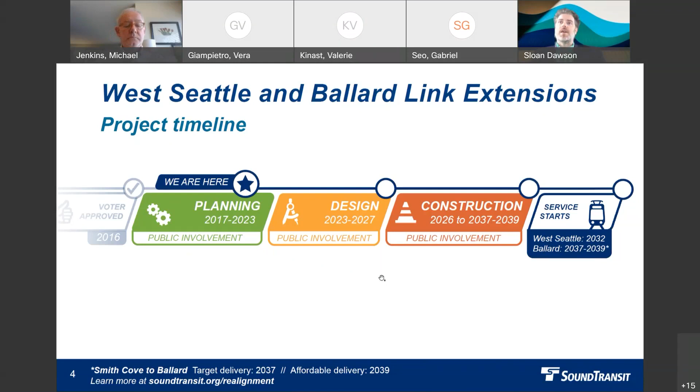So looking a little bit more at the planning phase, we've been in alternatives development from 2017 to 2019, which really defined the routes and station locations that we're going to study in the EIS. Now we've been working towards the draft EIS and just published that at the end of January. We're in the public comment period for the draft EIS, and that will close on April 28th.

At which point the board will confirm or modify the preferred alternative, which we do have for this segment coming out of alternatives development. The only segment where we don't have that, as we learned in our last presentation, is in the CID. So this upcoming milestone will be either a confirmation or modification of preferred alternatives, or identification of preferred alternatives in the case of the CID potentially.

This will move us into the final EIS. And once we're through the final EIS, there will be a record of decision that identifies the project to be built and moves us into final design and construction.

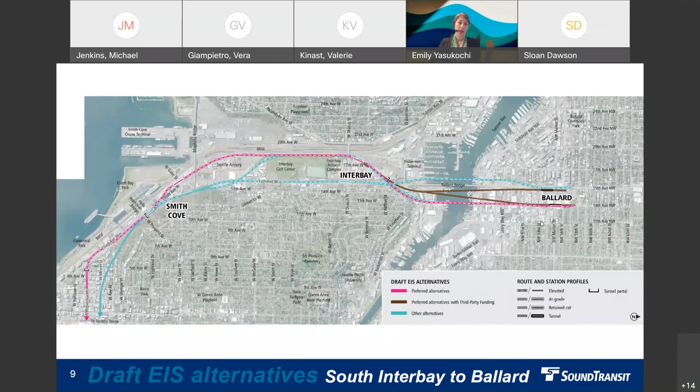Also want to point out where it says Interbay in bold, that's another segment boundary, and you can see there are two areas where those connect: either behind, between the golf course and the railroads, that's one connection point, and then 15th Avenue is a different connection point. So as I go through these, you'll notice that alternatives connect at one point or the other, and those are limitations to potential connections in the draft EIS.

So I'm going to start with some general information, including some of the project benefits and other information about the project.

This slide shows transit travel times and reliability information. In the PM peak in 2042, the project is expected to get riders from 15th and Market in Ballard to Westlake downtown in about 11 minutes, as compared with 38 minutes by bus. For reliability, Link would have an A rating, while the bus would be an E or F in the evening peak period.

Next slide is ridership.

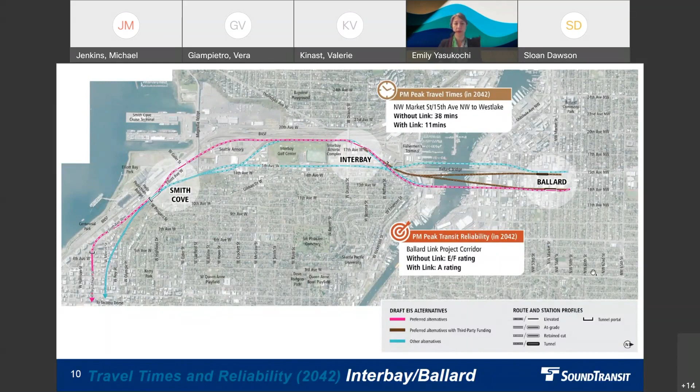For Smith Cove Station, ridership is anticipated to be about 2,600 average daily boardings, with most getting there by walking. For Interbay Station, ridership is forecasted at about 4,200 daily boardings, with two-thirds getting there by bus. And for Ballard Station, ridership is expected to be around 13,100 daily boardings, with just over half getting there by bus and another about 40% walking or rolling.

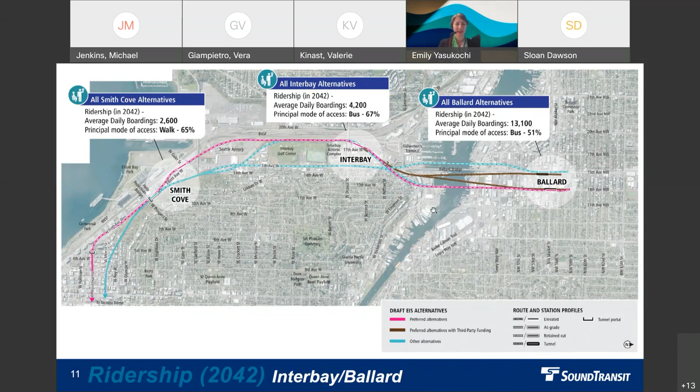The next slide is information on transit-oriented development potential for each alternative and station location. Because we're crunched for time, I'm not going to go over these in detail, but I'll note that in developing these estimates, Sound Transit generally used current zoning designations to model potential development capacity, but in some cases, modified zoning was assumed.

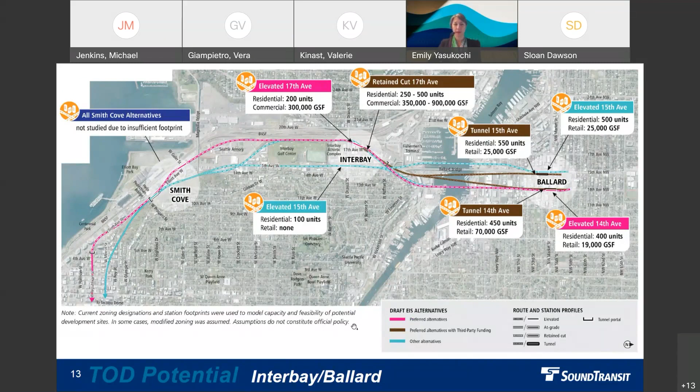So with that, I will go on to the draft EIS results, and I'm going to start in South Interbay. I'm going to go over the alternative first, and then I'll quickly go through some of the results, but you'll probably be able to absorb a little bit while I'm talking.

So the Galer Street Station Central Interbay alternative comes from that Republican Seattle Center station, continuing in a tunnel after it leaves that station. The tunnel portal is basically at the end of Republican, right before Elliott. From that tunnel portal, the alternative would become elevated, traveling up Elliott. Immediately after the portal, it goes to the west and then crosses back to the east side, travels up the east side, and then just north of Kinnear Park, it crosses back over to the west to serve an elevated Smith Cove station located above the Galer Street Bridge. It would then cross over the Magnolia Bridge and continue north along the western edge of the Interbay Golf Center, where it connects into the Interbay Ballard segment.

This one has a cost of approximately 1.3 billion. Let me go over the categories—they're similar within the segment. Each alternative in this segment will have project cost, residential displacement (units of residential displacements), historic property effects (number of properties), permanent park effects (permanent park area that would be displaced), biodiversity effects (essentially wildlife habitat area that would be displaced), and roadway effects, related to the approximate length of guideway that would be in or near arterial roadways—so Elliott and 15th in this segment. Some alternatives have more guideway in or near the roadway, which comes with things like columns in the roadway affecting permanent operations at some intersections, and also construction effects to build those.

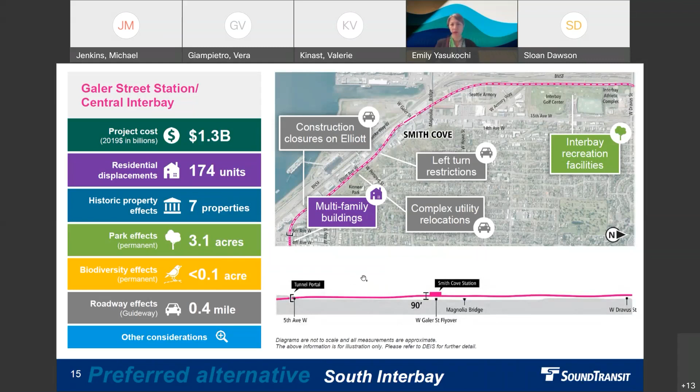Just to point out on this one: a project cost of 1.3 billion and 174 units of residential displacements, which is on the higher end for this segment.

Next slide. Now I'll talk about the Prospect Street Station 15th Avenue alternative. This one also would come from the Republican Seattle Center station, so it has that same portal at the end of Republican, the same guideway crossing a couple times over Elliott, but then it would come up the east side of Elliott to serve an elevated Smith Cove station just north of Prospect Street on the east side there.

And then it would continue along the edge of the Southwest Queen Anne Greenbelt before turning north and transitioning to the center of 15th Avenue, where it would continue up the median of 15th Avenue and connect in.

This one has a project cost of about 1.4 to 1.5 billion and is also higher on the higher side for residential displacements. It's on the lower side for park effects, but higher for biodiversity, because of that guideway in the Queen Anne Greenbelt area.

And this one has the most roadway effects at about a mile, because it has guideway both in Elliott and in 15th. And then the other considerations in the lighter blue color, that's just a place to put other things that are important to know about the alternatives that didn't fit into one of the categories above.

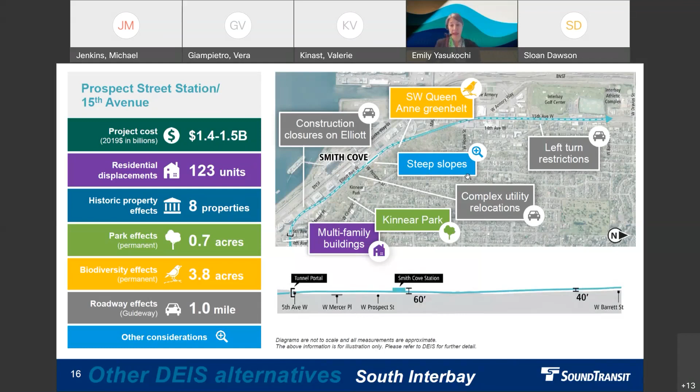This alternative has some guideway and station in the Queen Anne hillside, which is a steep slope ECA, or environmentally critical area. The need to stabilize the slope there would add some complexity to this alternative.

Next we have the Prospect Street Station Central Interbay alternative. This one comes from a different Seattle Center station, the one located under Mercer. It would continue underground from that station in a tunnel for a bit longer to the north.

Its portal would actually be around Prospect Street and Elliott on the east side. It would then serve a retained cut Smith Cove station just north of Prospect, curve along the bottom of the hillside there, turn west, go over 15th, travel up Armory on elevated guideway, and then turn north to continue along the western edge of the golf course.

This one has the highest cost of the three at about 1.5 to 1.6 billion. It also has the highest park and biodiversity effects, but the lowest residential and historic effects, and also the lowest roadway effects. It also has the station and guideway in that Queen Anne hillside steep slope area.

So it would have that similar issue with the complexity of needing to stabilize that slope.

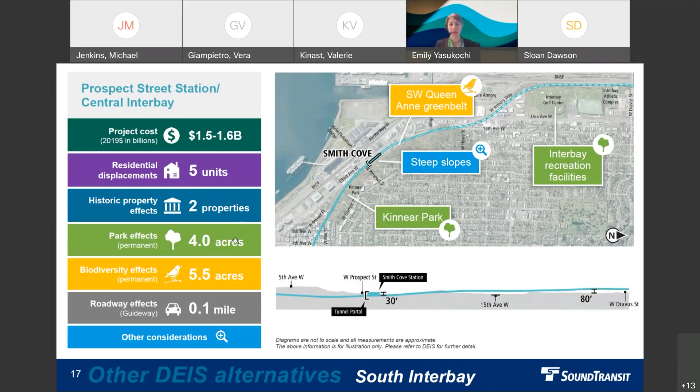Next is the summary slide, showing all those numbers together on one slide so you can see them all at the same time. We've added some shading to these: darker shades indicate higher performing elements, whereas lighter shades indicate lower performing elements.

I won't go over each of these, but we can maybe just pause here so you can take this in a little bit.

Okay, I know I'm kind of racing through these, but we have a lot to get through. So let's move on to Interbay Ballard, the segment to the north.

We'll start with the elevated 14th Avenue alternative. This one connects to those that come from the western edge of the golf course near the BNSF tracks. It would cross over the Dravus Bridge and serve an elevated Interbay station just north of Dravus, then continue on elevated guideway northeast over the Emerson Street interchange.

Then it would curve north to cross Salmon Bay on a high-level fixed span bridge. On the east side of the Ballard Bridge, it would continue north along 14th on the Ballard side and terminate at an elevated Ballard station on 14th Avenue Northwest, straddling Market Street, with entrances on both sides of Market.

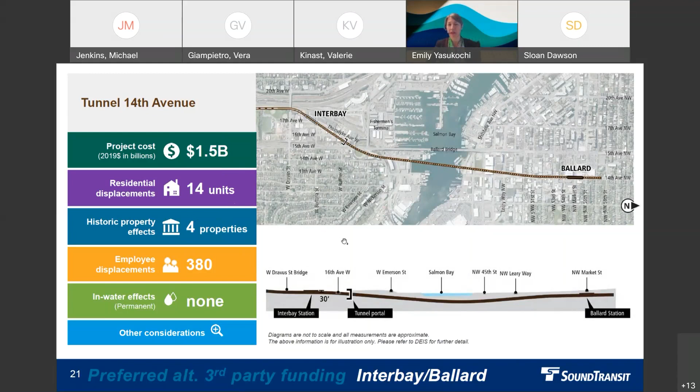With an estimated project cost of 1.5 billion and no in-water effects, all of these numbers, as you'll see when they're compared, are on the lower side of the various alternatives—lower in quantity, higher in performance.

Next we'll do the tunnel 15th Avenue alternative. This one is essentially the same: under Dravus, same retained cut Interbay station, same tunnel portal. Once it leaves the tunnel portal, it ends up in a different place—at a tunnel station on the east edge of 15th, completely south of Market Street, with entrance only on the south side of Market.

This one has an estimated project cost of 1.7 billion. When you see the comparison numbers, you'll see these are all on the lower side or higher performing side.

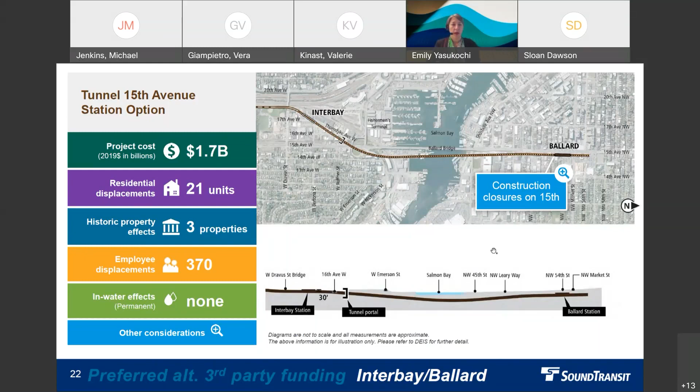Let's move on to the elevated 14th Avenue alignment option. This one connects the 15th alternative south of here to the 14th Bridge we've already talked about. It would have an elevated Interbay station above 15th and Dravus, then curve to the northeast and head north on that same high-level fixed bridge at 14th, same elevated 14th Avenue Ballard station. This one has a project cost of approximately 1.6 billion, and is higher—I think the highest—in residential displacements, a lot of those in some multifamily buildings in North Queen Anne.

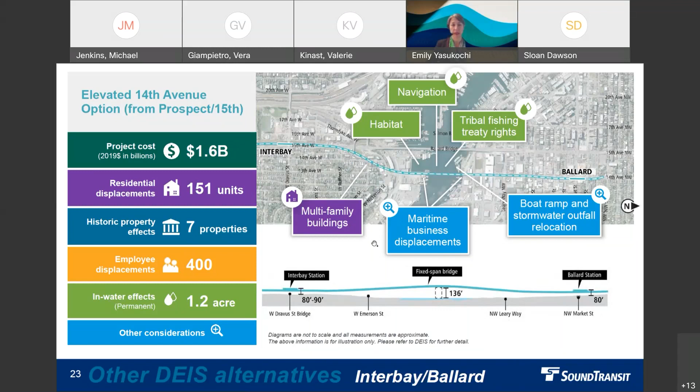We've already talked over some of the water and maritime business issues, so I won't spend time on that. We'll go to our last alternative here: the elevated 15th Avenue alternative.

This one also has that elevated Interbay station at 15th, over 15th and Dravus. But then it would curve to the west of the Ballard Bridge and cross Salmon Bay on a movable bridge span, continue north, then shift over to the east to join up with 15th, ending at an elevated Ballard station above 15th Avenue south of Market Street.

This one has an estimated project cost of 1.5 billion, with a lot of the same water-related effects. It has the eligible historic district at Fisherman's Terminal, so it would have effects there. Because it's a movable bridge span, we would expect some delays to the system when that bridge needs to open or raise for larger, taller vessels. This one is also the highest for employee displacements, with a big chunk related to the displacement of a commercial complex at 15th and Market.

Next we just have the summary slide. Again, same shading—darker indicating higher performance, lighter indicating lower performance. We'll pause here again and let you take it in.

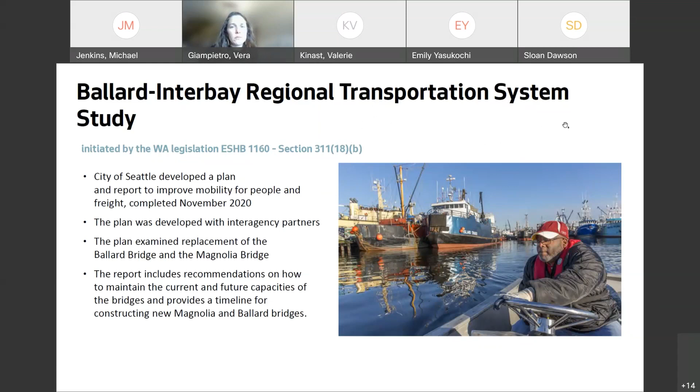So in 2019, just prior to the completion of that study, the city worked on what many of you are familiar with, the Mandatory Housing Affordability Program, which was adopted by council in 2019. I'm focusing on Ballard here because it's one of our hub urban villages in the city, and as you know, a location for a proposed Sound Transit light rail station.

When we worked on this project, what it involved is saying we're going to offer more development capacity, primarily within urban villages but also within our multifamily and commercial zones, and in exchange we will require contributions to affordable housing.

Part of what we did during that time is look at our comp plan, our most recent comp plan, which had a growth and equity analysis showing some parts of Seattle seem to be at higher risk of displacement and some at lower risk. Complementary to that, we saw some parts of the city have higher access to opportunity, and there are a bunch of metrics that help evaluate what contributes to displacement and opportunity.

As an overarching concept for MHA, we said, okay, if we're going to add development capacity but keep an eye out for displacement, in high opportunity areas that may have a low risk of displacement, we will expand an urban village boundary and make meaningful changes to the zoning development capacity there.

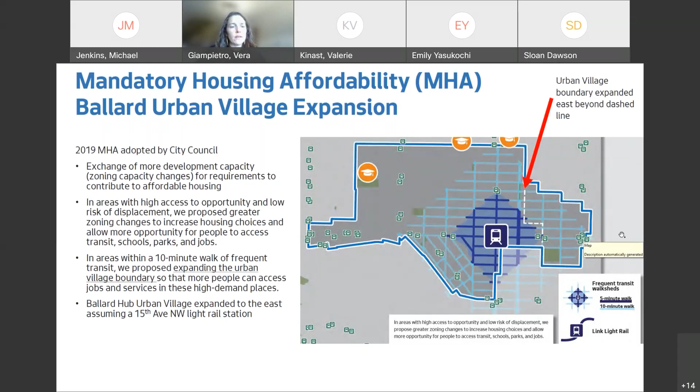We can move on to the next slide, and I'll have Geoff Wentlandt take it from there.

Thank you, Vera. I have a few slides here to tell you about the industrial and maritime strategy, which is long-range land use planning the city is currently doing. One of the major drivers for that is to anticipate light rail and prepare a future land use vision to accommodate it. I have a handful of slides, and I'm going to try to be brief and keep us on schedule.

Two-thirds of those jobs are accessible without a traditional 4-year college degree, and many remain unionized with high quality benefits and great starting salaries. It's also important to note that deep water ports and freight and rail infrastructure are irreplaceable assets that really can't be located anywhere else.

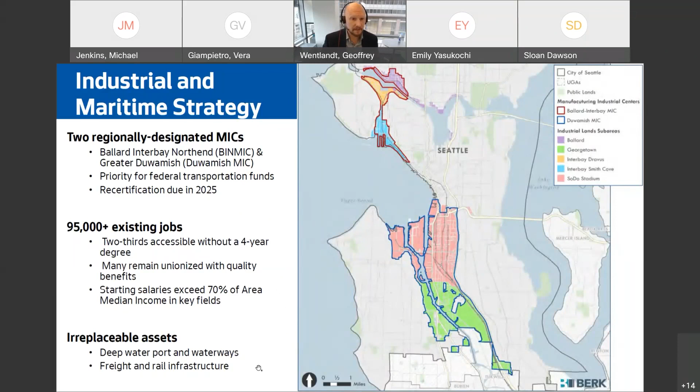There have been many efforts to update the city's policies for industrial lands, going back decades, but there hasn't been a major update in almost 30 years. However, under Mayor Durkan in 2019, she convened an advisory council with 60+ members from a broad cross-section of labor, port, residential community members, businesses, and more.

They were able to arrive at consensus recommendations in June of 2021 on what we refer to as the 11 strategies, and those 11 strategies help form the land use proposal I'll be discussing today. There was some early implementation of those strategies related to workforce training, green infrastructure funds in the Duwamish Valley, and launching an environmental impact statement on proposed land use changes.

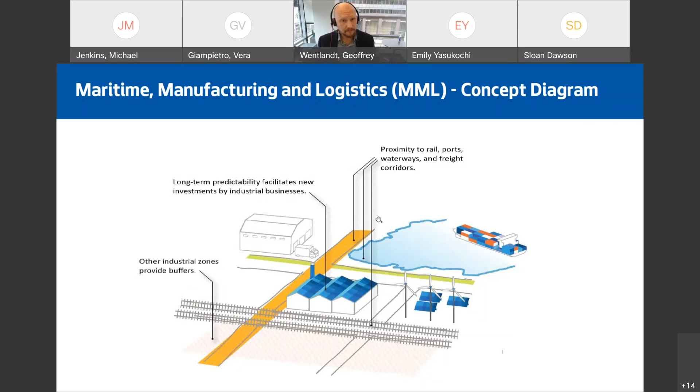The third and final concept is what's titled the Urban Industrial Zone concept. This is envisioned to improve livability at the edges of the city's industrial areas, near urban villages, places like Ballard, for example. The idea is to change zoning to do more to encourage a variety of small shops, makers, arts, and light industry space, improve vegetation, landscaping, tree planting, have good walkability, etc., and really be complementary to residential areas at the edges of our industrial areas where they abut urban villages. There could be some potential for limited new housing in this concept, so we're studying a range of that.

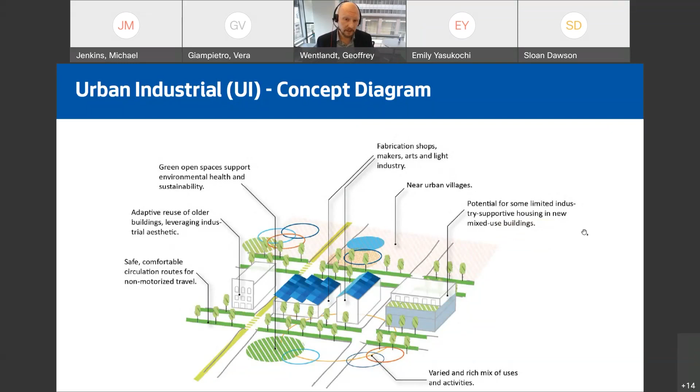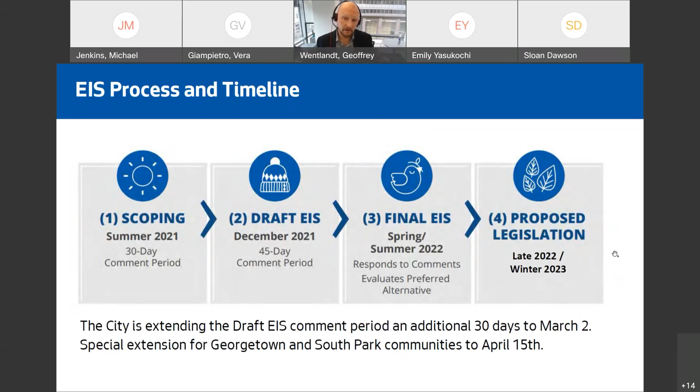So the city is in the middle of an environmental impact statement looking at this land use proposal. This is a different EIS than Sound Transit's EIS, but we believe they're coordinated. This is the timeline: the draft EIS comment period just closed in March. However, we're doing some additional engagement with Georgetown and South Park. We expect a final EIS this summer, and that could potentially queue up land use changes late this year or early next year.

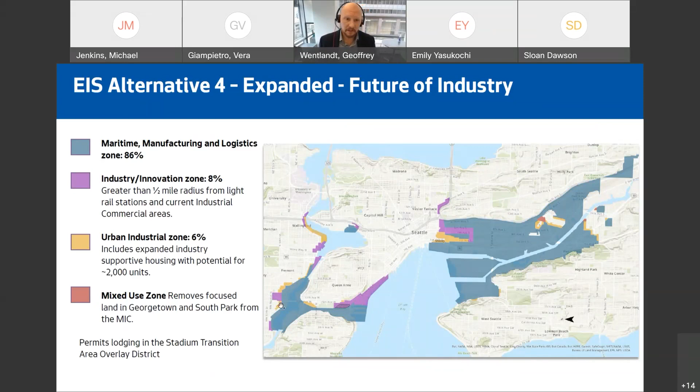So just to wrap up, a couple of points that may be worth considering in your review. The Maritime Industrial Advisory Group discussed how to minimize adverse impacts on the function of the manufacturing industrial centers. That included avoiding impacts to maritime activities in Salmon Bay—that was very important to the group. This work explores the potential for an employment-dense, transit-oriented development model appropriate for maritime or manufacturing industrial centers: the healthy edge areas that I spoke about.

The recommendations also specifically spoke to the Interbay Armory site, a large site that could be reused in the future, calling for site-specific master planning of that property when it can be reused. Lastly, I'll note that our draft environmental impact statement did find that there really would be a need for multimodal improvements near the station areas in the manufacturing industrial centers, because there's a real lack of sidewalk and bicycle infrastructure and safety conflicts. So our EIS amplified the need for those corresponding investments. With that, I'll conclude. Thanks for the chance to provide this context to you today.

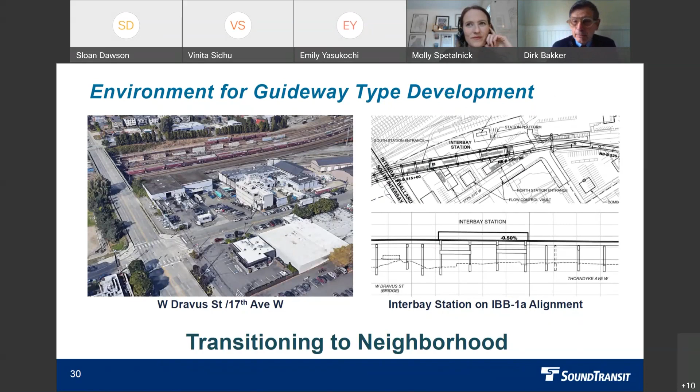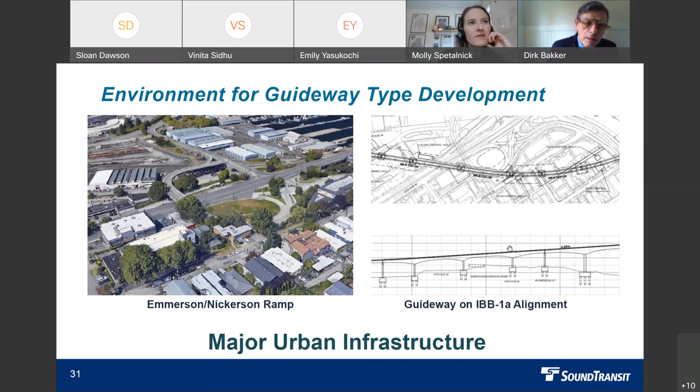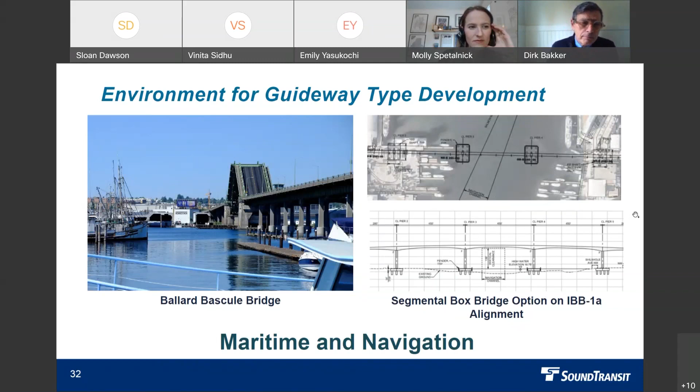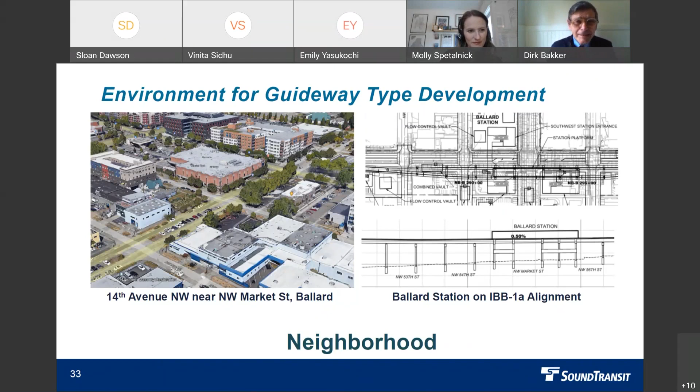Geotechnically, the foundation types and ground improvement methods play a really big role in this design. The soils that we travel through - there's a lot of fill on this alignment and in this area - so ground improvement is a major issue when we're looking at the design.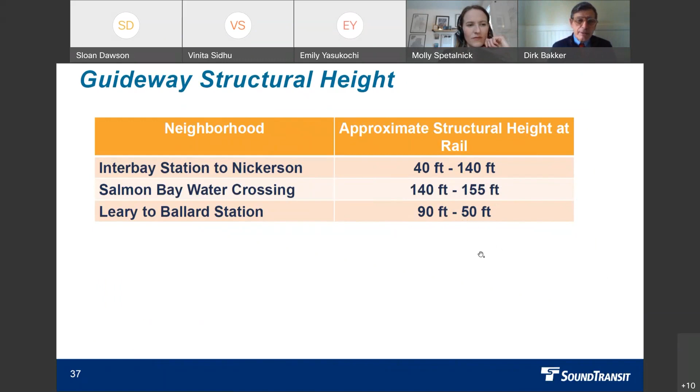Here is what we call a twin single track guideway span. This is what you would see near Interbay Station or near Ballard Station, where we have to approach a station, and the station has a center platform. On the left, we would have I girders, two I girders to carry the track, and on the right side, we have the tub girders. So two different solutions.

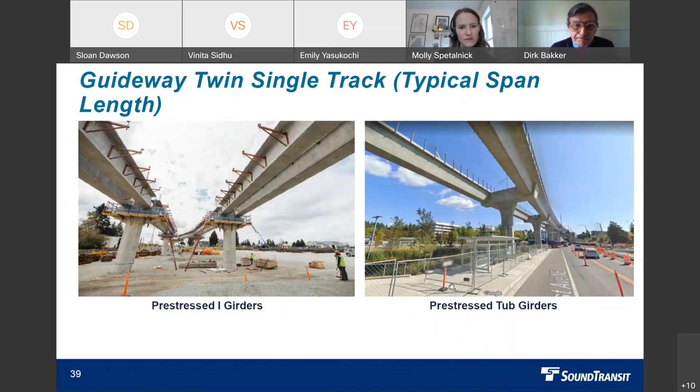Here is the segmental box girder. We showed you the table. We have quite a bit of long span, longer than 200 feet, and we would need to use this type of girder, this type of span. This picture shows what we've done in the Duwamish Valley, a crossing over I-5. On the right is another example of such a long span girder on a curve.

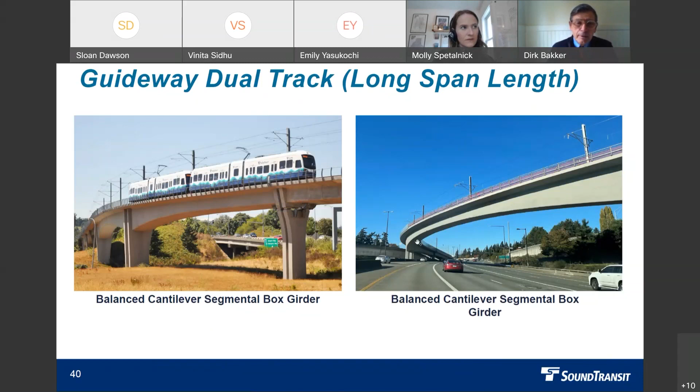Next slide. So the next couple of slides are going to be about the Salmon Bay crossing and some of the concepts that we've reviewed up to this point to inform the DEIS and our work. Next slide.

The first here is what we call our segmental box girder bridge concept. That's our baseline, and we talked about it a little bit here. The span lengths are approximately 450 feet. The bridge is well balanced over the navigation channel. But as you can see, we still have columns in the water, and we have columns within the maritime properties. Next slide.

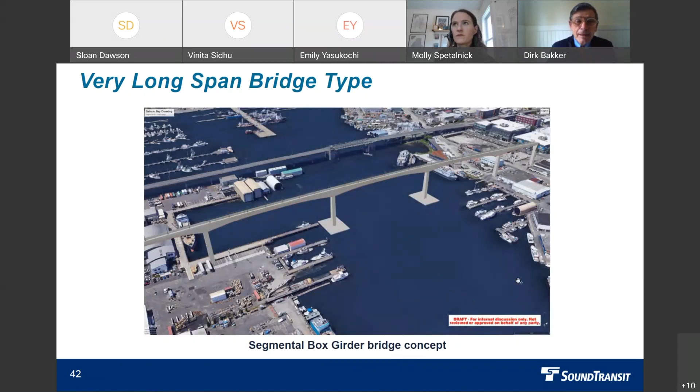Here's an example of a network arch bridge. The span lengths are not necessarily much longer than what I just showed you on our typical segmental box, but it's a different solution. You have a little bit more flexibility with spacing, but as you can see, as far as the columns are concerned, they fall pretty much in the same location as in our baseline segmental box girder.

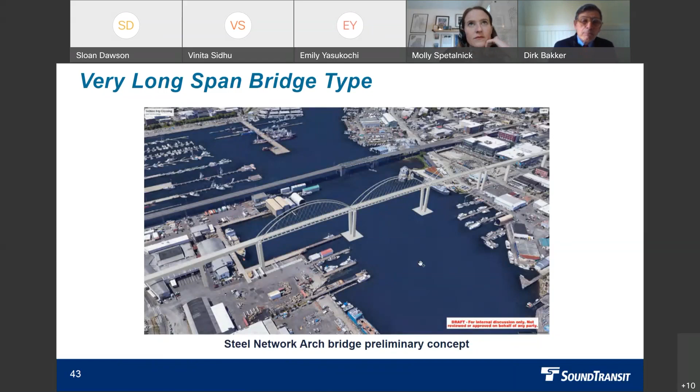But in terms of span length, you could do more with this type of bridge. As you can see, it's not just the span length in the Salmon Bay crossing, it's also trying to place columns in such a way that they don't affect the shoreline. There is shoreline access on 14th Avenue, so we need to keep that in mind. There are also maritime properties on the south side of the bay, so you want to place those columns to have as little effect as possible. It's a real puzzle to serve all those goals and find the right solution.

Next slide. This slide shows the cable stayed bridge concept. This bridge can span longer, I think the optimal span is somewhere in the range of 1,100 feet. The foundations get bigger, and clearly you can see here that we still do not get ourselves out of the water. The bridge itself gets bigger, the towers get bigger, and as you can see on 14th Avenue, the tower there takes up quite a bit of the shoreline.

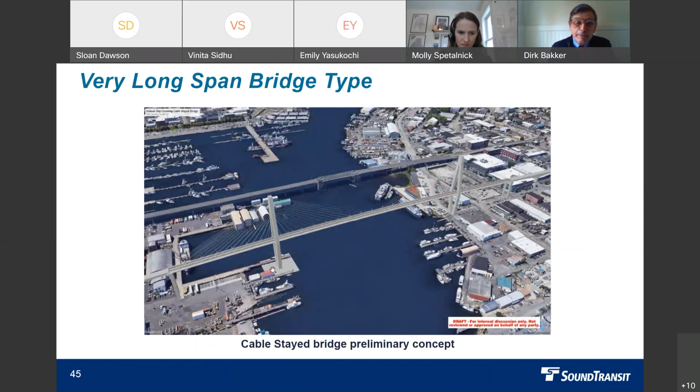Next slide. This is the movable span bridge on the 15th Avenue alignment. Emily went through all of the alignments. There is an alignment on 15th that comes from 15th Avenue and then moves over on this side of the Ballard Bridge. This particular alignment has a movable long span, and the concept shown is a vertical lift bridge, so the span would lift up to a vertical clearance of 136 currently.

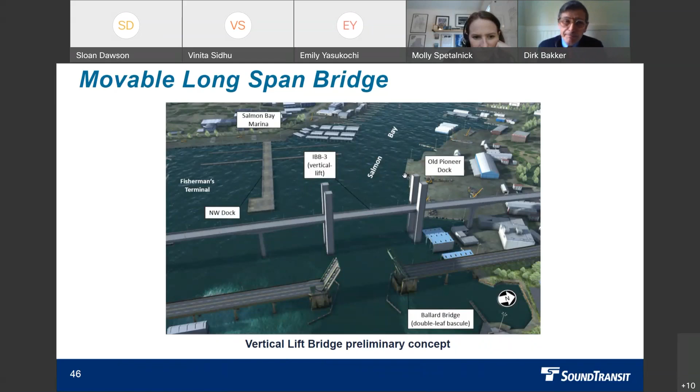Next slide. So some design features, some concepts - I'm going to show those now in the next number of slides. The column proportion is very important when you place yourself in the environments that we have here.

There's different things we can do, things like plumb versus tapering. We can have a single mast, we can have double blades. I already showed some of those in the water crossings. We have single columns and straddle bents, and then there's things like diamond-shaped columns, H shapes, or A-shaped towers on the larger crossings. We're going to show a little bit about constant depth versus haunch depth, chord versus smooth curve for horizontal curvature.

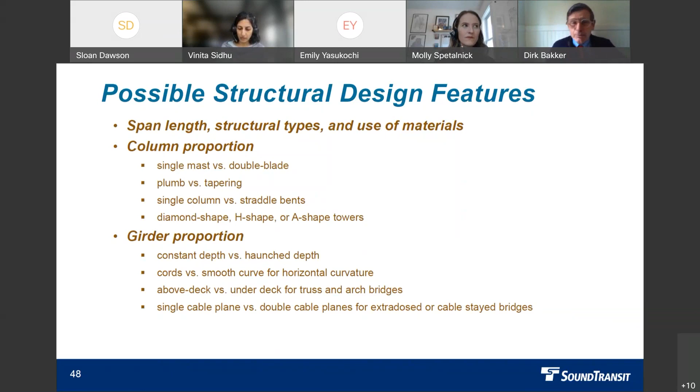There's other things like above deck versus under deck for truss and arch bridges. We haven't really shown these here, but that comes into play at the Duwamish a little bit. And you can have single cable planes versus double cable planes if we are looking at extradosed or cable stayed bridges. So there's quite a few things that if we were to move into the preliminary engineering, when we do some more design exploration, these are things we could look at.

Here are some of the column proportions that we talked about. There's the typical plumb, there's the tapered. You can have a single mast or you can have a double bladed mast. So those are things that we can consider when we're looking at designing this structure.

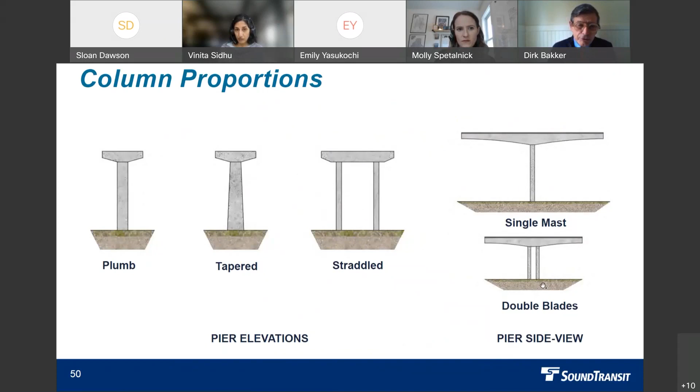Here's more for the bigger crossings. Diamond Tower has 2 cable planes, the H Tower with 2 cable planes, and then the A Tower. So these are examples under consideration if we were to build these structures.

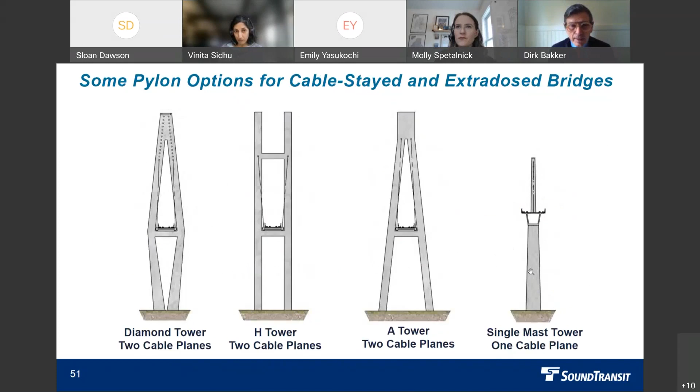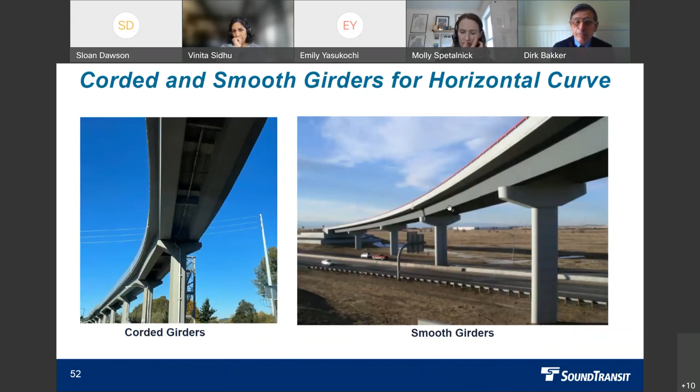Here's corded or smooth girders. We have some horizontal curvature on this particular segment, so there's different ways of doing that. It can be a smooth girder, as you see on the right, and it can be a corded girder, as you see on the left, shorter spans, but it can be balanced.

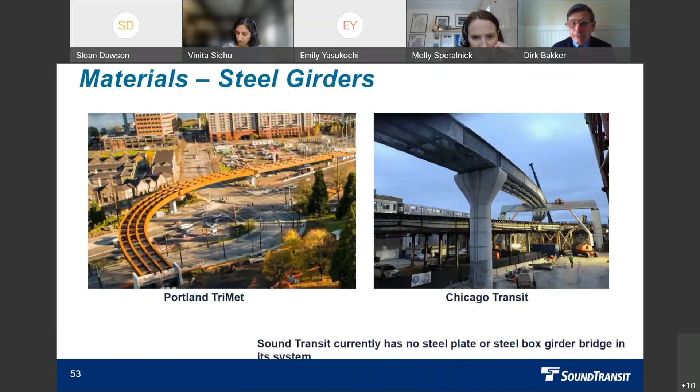A little bit about materials. Sound Transit currently has no steel plate or steel box girders in our system. But we keep this option open for specific situations if it is a possibility. But currently we don't have that. These are examples from different cities.

We'll show you some architectural details that we've used in other locations for Sound Transit.

Here is an example of our decorative railing that's used in certain locations. On the right is that picture of that span over I-405. You can see it has very nice railing. Wall screenings for sound walls, if a sound wall is necessary in some locations. There's ways to enhance those.

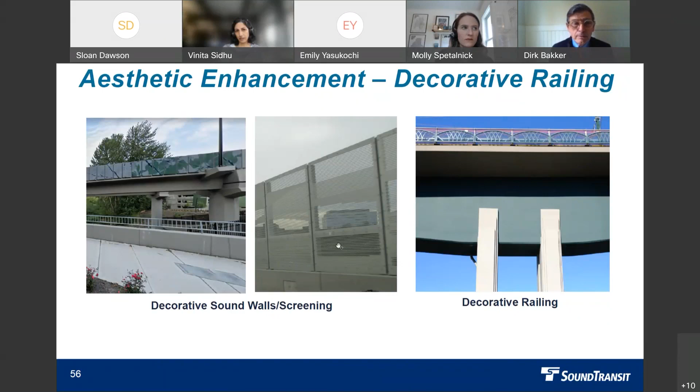And here's an example of artwork, painting or some other attachments. These are just examples. But the idea is that if there's spaces under the guideway, and these are very big structures here, we're not as wide as these structures that are shown here, but there is a possibility to enhance any spaces like that.

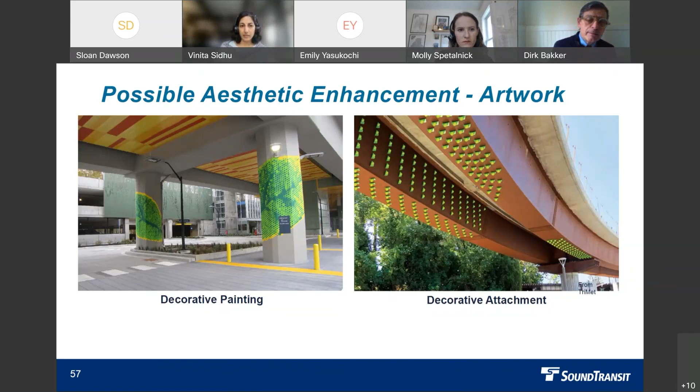Before we go into Q&A, constructability. Both constructability and the soils are not very conducive to making it easy for the structures. Very poor soil conditions on large portions of the project. So that is really a consideration. Duration of construction and access of equipment to install the structures is also a consideration in choosing the right solution.

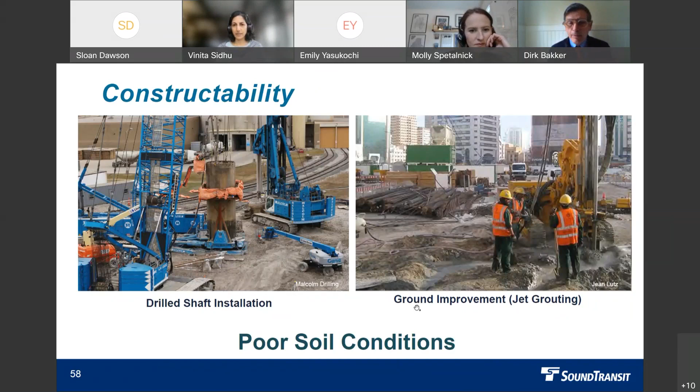That's probably the last slide, right? That is. Thanks, Dirk.

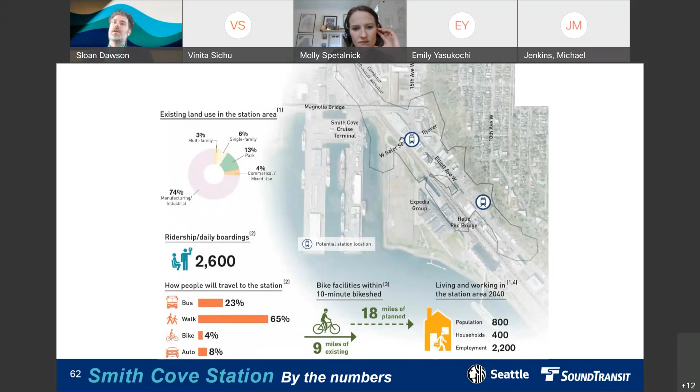So there are a lot of constraints, but also a lot of interesting destinations and opportunities happening in the vicinity, and a lot of thinking happening through the city's industrial lands effort. Nonetheless, given these constraints and what we know right now, this would have fairly low ridership in terms of daily boardings, owing to these constraints and the fact that you have large destinations, but perhaps not a diversity of destinations in quite the same way. We also anticipate that most folks will access the station on foot—really coming from Expedia and those big destinations nearby.

So this slide summarizes, as we've covered in previous presentations, some of the key points of feedback that we've received in early engagement activities with communities and with neighborhoods in the vicinity of the stations.

This is really focusing on some of the things I've already covered in terms of a desire to think about how the station location and improvements serve to connect the neighborhoods, particularly Queen Anne, to the waterfront, and thinking about opportunities for improving the connections up the hillside into Queen Anne, particularly 10th Avenue West and Olympic Way, and potentially opportunities to also connect into the Kinnear Park circulation network.

And then, of course, thinking about the station's access to some of these major potential redevelopment sites: the Interbay Armory site held by WSDOT, the state of Washington, and the Terminal 91 Uplands and Smith Cove Cruise Terminal held by the Port of Seattle. Of course, the bridge infrastructure in this area is a big concern too, with the Magnolia Bridge being a major feature and connecting point from the Magnolia neighborhood into the station, which we'll see as we walk through the transit integration slides.

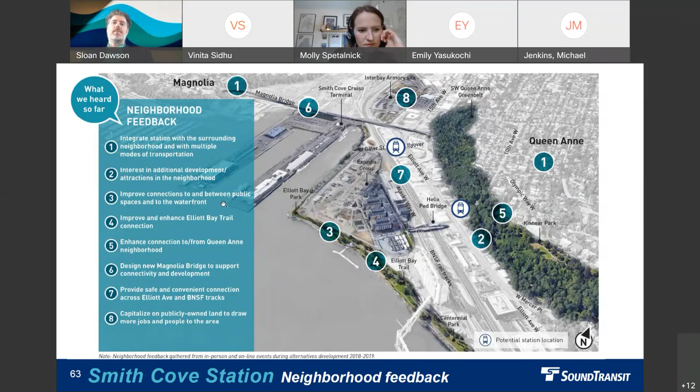So we're going to start with the preferred alternative, looking at the preferred alternative for Smith Cove Station. This is the elevated Galer Street Station. The platform would be elevated, spanning the West Galer Street flyover with entrances on either side of the flyover at the Elliott Avenue grade, as well as the potential to tie in to the Galer flyover pedestrian path at the mezzanine level of this North Station entrance.

Again, the adjacencies: the Southwest Queen Anne Greenbelt is just across Elliott Avenue, and the on-ramp, off-ramp complex between the Magnolia Bridge and the Galer Street overpass. It's quite close to the Terminal 91 entry, which is at the upper left part of the graphic. Also proximate to the Interbay Armory site, a fairly quick walking distance north to access the south end of the site. And it's also a little bit more distant from the Expedia entrance compared to the other alternatives that we'll be looking at shortly.

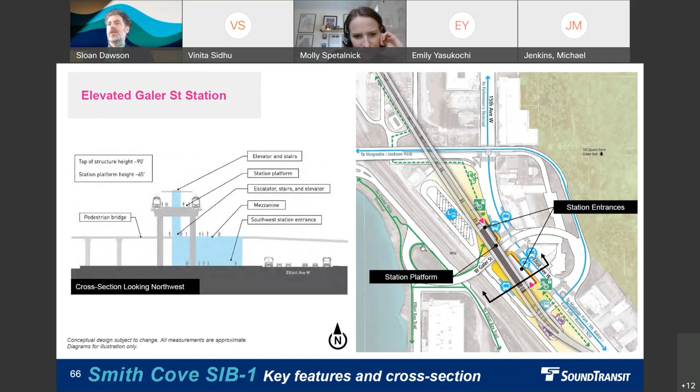As I mentioned, the station entrances are on either side of Galer Street at the Elliott Avenue grade. You can see here the cross section on the left side of the slide shows that entrance oriented towards Elliott Avenue, as well as a mezzanine concourse level that would be essentially at the Galer Street overpass grade, with an opportunity to tie in at that mezzanine level to the Galer Street overpass, which, as I noted, is a main point of connection to the Elliott Bay Trail and to Expedia and Terminal 91.

For the transit circulation scheme here, there are several important things to note with Smith Cove Station. One is that it is an important point of connection for Magnolia bus service, local bus service, and rapid ride service that essentially connects Magnolia to various other places in the future Metro Connects 2040 network.

It's also a designated site for the terminus and layover of some regional routes that Metro operates and will operate in the future, running from East King County and South King County through downtown. So this would essentially be the spot where they'd run through the major employment centers downtown, then stop and layover here before re-entering service. This is a really important administrative and operational function for Metro and the regional service routes, especially as those layover sites are shifted from existing locations in downtown and South Lake Union. So in all of these Smith Cove concepts, you'll see designated layover areas, and it's an important part of the program of the station here.

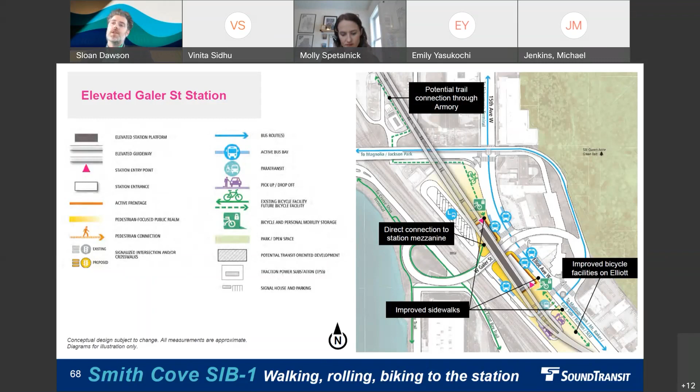This is showing the bicycle pedestrian connections through the station area. As mentioned, the direct connection to the Galer flyover provides a direct interface with the Elliott Bay Trail and walking and biking paths to the south towards downtown and Expedia, as well as to the north such as Terminal 91 and Magnolia. We note here also a potential trail connection through the Armory property paralleling the guideway, which could provide either augmented access and capacity, or redundant capacity to the Elliott Bay Trail, or facilitate a shift in that trail's alignment to connect up with the Ship Canal Trail. We're also showing improvements to sidewalks and potentially new facilities that could be introduced on Elliott in tandem with the guideway.

And then finally here, looking at the opportunities to enjoy places around the station. This particular location, really all the Smith Cove locations, are quite constrained in terms of the requirements of the infrastructure, the adjacent natural features and barriers. And so this doesn't yield quite the same opportunities for transit-oriented development that we might see at other station locations that we've reviewed so far in this series of meetings. And the geometries are quite constrained as well. So Smith Cove is one of the few station areas along this whole project where we really didn't identify a critical mass of redevelopment opportunities post-construction.

So here the nature of the challenge really is to think creatively about the public space under the tracks, which could include either sort of a park or plaza programming function, or in the case of this alternative in particular, given its proximity to this major infrastructural complex, are there other smaller scale uses that could be programmed under the guideway, potentially in this area here, that might not be sort of what you typically think of as TOD, but maybe a smaller scale use that helps to activate and hold that corner, particularly as the guideway transitions north of the Magnolia Bridge and into the Armory property. So that is something that we've identified as something to really think about further if this alternative moves forward.

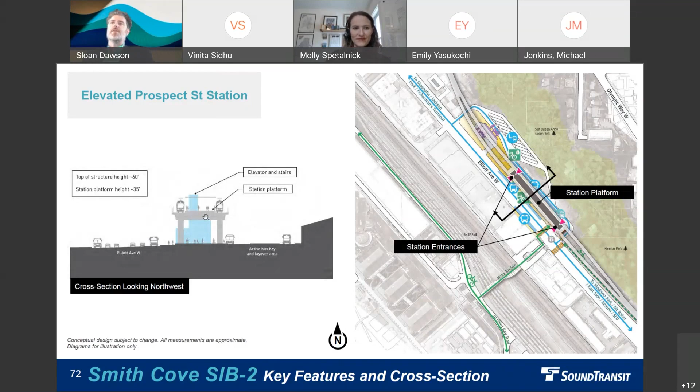The transit integration scheme is a bit more consolidated compared to what we were looking at for the preferred alternative at Galer. Northbound buses could consolidate their stop zones on the east side of Elliott here. There would be an additional zone for through routes heading southbound, essentially from the Magnolia local service into downtown. And then another zone for picking up passengers as buses are transitioning from layover and getting back onto their southbound routes, heading to the east side of King County or South King County.

Also noting here the pickup drop-off functions that could include shuttle services, and then paratransit, which would be located adjacent to that south station entrance.

Some of the walking, rolling, and biking considerations at the station: there would be a new crossing on the north side of Prospect Street and Elliott to accommodate the additional pedestrian capacity envisioned to access the station. Because of the height of the structure here, there isn't the same opportunity to extend the Helix Bridge or elevated pedestrian infrastructure across Elliott Avenue, since there isn't a mezzanine structure to tie into. So this would require folks to come back down to grade, cross, and then rise back up to the station platform from grade.

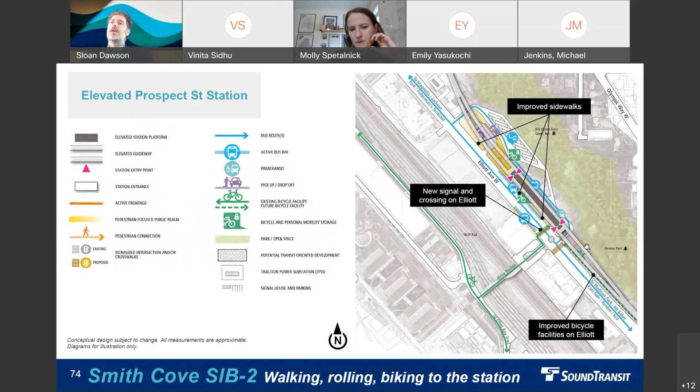Similarly here, there isn't an opportunity for transit-oriented development, given the footprint of the infrastructure and the topographical landscape constraints, but also noting the opportunity for creative uses under the tracks, potentially even tying into the Kinnear Park landscape and programming as we move through this section of the corridor.

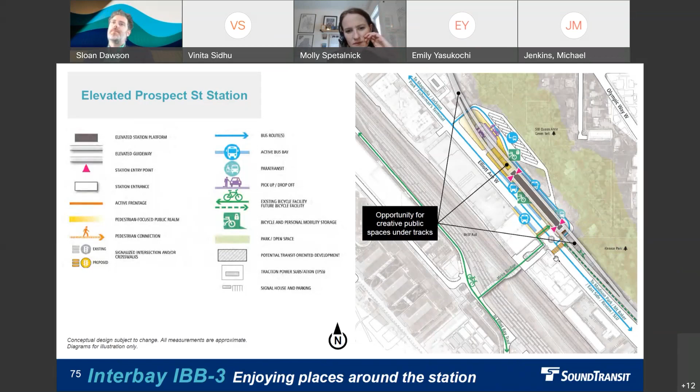And then finally, the third alternative we're looking at in Smith Cove, other draft EIS alternative SIB 3, is a retained cut station at Prospect Street. This is connecting to the Mercer Street alternative at Seattle Center, so DT2, and transitions to that central Interbay alignment via Armory Way, as Emily was pointing out earlier.

This, of course, isn't elevated—we're slightly below grade, so you'll see that, but many of the context, essentially the location, is the same, so the context and adjacencies are very similar here. The main difference is the station platform and the guideway are below grade, so rather than being elevated 35 feet, we're now 35 feet below grade.

This would be an open cut essentially from the portal, which would be right south of Prospect Street, to where it transitions to at-grade structures behind the Magnolia Bridge on-ramp facility just to the north, around Galer Street. Because that grade is changing, you'd start to have too shallow of a cut to really introduce lid structures to potentially recover some development capacity. But we'll study that or show that in a little bit.

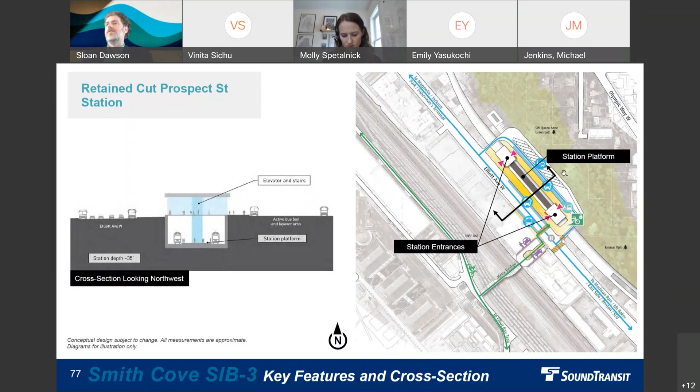The station, again, has two entrances, one right at Prospect Street, one a little to the north, close to Lee Street. The cross section at left shows the entrance structure pavilion with vertical circulation down to the center platform. And in cross section, the relationship to Elliott Avenue and the layover looks very similar to the elevated alternative.

So transit integration is very similar here in terms of the stop pattern as the elevated configuration, noting that the bus layover facility would be a little tighter and would probably require a more robust retaining wall, given that there's more footprint taken up at grade and not as much space that could be reclaimed for this function at grade.

Noting the opportunities for improved sidewalks here, as well as that signal and crossing at Elliott.

Also an interesting opportunity here, given the retained cut profile of the station, is potentially an opportunity to connect or extend the Helix Bridge to connect into Kinnear Park and potentially tie into the station entrance. So that would be something that, if this alternative moved forward, could be evaluated in partnership with the city and others.

Also pointing out here the pickup drop-off that could potentially be located adjacent to the Helix Bridge and adjacent to the transit facility that Expedia constructed just to the south of that bridge.

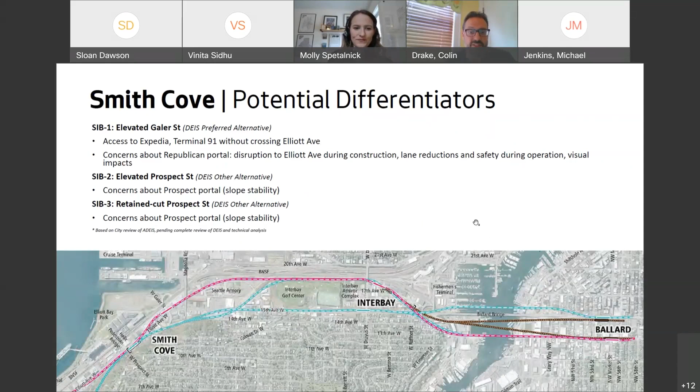Next slide please. As I mentioned, even before the DEIS came out, the interdepartmental city team discussed the relative trade-offs of each of these alternatives. Since Sound Transit released the DEIS in January, and over these next few months, as we participate in Sound Transit's engagement with the community, we'll continue to gather information that would inform a city preference on an alternative. At the end of April, we'll be transmitting our comment letter on the DEIS, which will include comments on a preferred alternative.

With our board members, Mayor Harrell and Council President Juarez, we will use the information generated by our interdepartmental city staff team and other city departmental leadership to inform their positions as the board works toward a vote in June, or a board meeting scheduled for June at the moment, to confirm or modify the preferred alternative. Next year we will continue our engagement.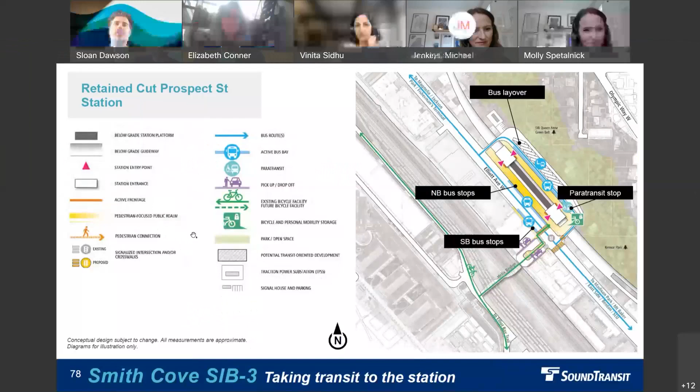The challenge with all of the Smith Cove station alternatives is that there are major constraints. You have the steep slopes, which are already a big technical problem as well as a visual one, in terms of retained structures, more for the Prospect Street alternatives. Then you have the important freight corridor of Elliott and transit corridor and the BNSF tracks. You just have precious little space. And given the geometry here, you end up with a very awkward remnant parcel, which is something we're really trying to avoid in all the other segments of this project. But given all the constraints in this area, it's kind of unavoidable.

So with this alternative in particular, if it moves forward as preferred, there really needs to be more thought in the next phase about how this would function. There's a little bit of space between columns where you might be able to site a single story building under the guideway, but then you have access issues with the layover facility there. Also, I neglected to point out earlier, this is the King County wastewater pump station, which isn't the most pleasant neighbor either. So there's just a lot of constraints here.

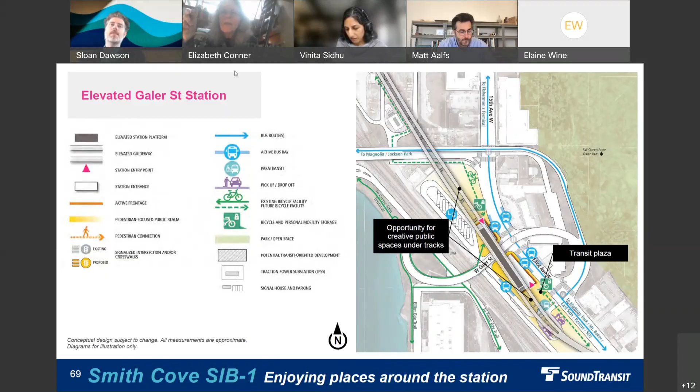That makes sense, thank you. I'll just make a comment on that and then pass it along. I think once again, artists are pretty good at finding opportunities in liminal spaces. It's a really intriguing nexus of transportation and cruise ship passengers. There are some very interesting things going on here. So I appreciate you looking at these unexpected spaces, possibly in new ways, and maybe getting community brainstorming around that for any of these particular alternatives.

Thank you, and I'm passing it along to Erica. Thanks Elizabeth, thank you guys. I think that this station actually has an amazing opportunity. And as Elaine mentioned, this really is a welcoming site to thousands of people entering our city every day. And the importance of the legibility of this site, I think, is paramount.

These are people that don't know our city, have never ridden our transportation system. So when they get off and are funneled through this byway, for it to be understandable to them... I also really think this is a remarkable opportunity for its strong connection to the Elliott Bay Trail, which I think can't be understated.

What an opportunity this could be for bicycle transportation in that corridor. There are really wonderful bicycle connections to North Seattle at this point, and because you have these remnant spaces, those could really be utilized to do something creative with bike storage in a way that hasn't been done in other stations across our network. That opportunity really exists here in a fun way, and could easily be integrated with the artist community as a fun exploration.

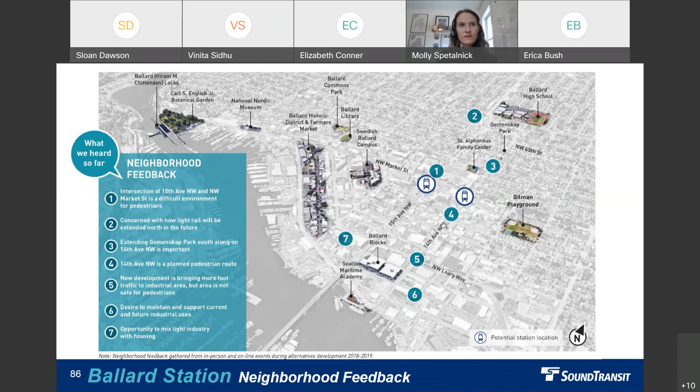So a lot of interesting adjacencies and tectonics to navigate in this station location. We're going to start with the preferred alternative, which is the elevated 14th Avenue alternative.

We'll start with the context plan here. Emily mentioned in her presentation that all the 14th Avenue alternatives straddle Market Street, so there are entrances on both sides of Market Street. This would be one block off of 15th, right close to the recent office developments and the Target that went in at 15th and Market.

Ballard Market would be essentially catty-corner from the north entrance. Some new residential developments, as well as the Safeway property, would host a station entrance with this alternative, as well as an opportunity for equitable TOD.

As we move south of 54th, we transition into that industrial area. So we have urban village zoning to the north and east in this image, and industrial zoning starting to transition in at 54th Street, which is changing in character with new breweries and other functions that incorporate production and retail into a footprint. So maybe some interesting mixing of those kinds of uses in this station area in the future.

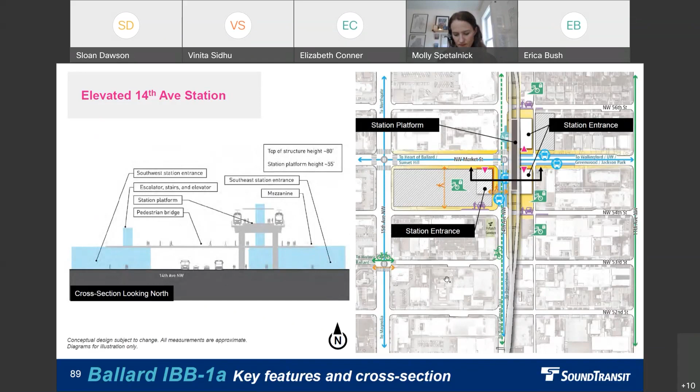This is showing the transit integration scheme for the elevated 14th station. So there are several routes converging on the station location.

I'll spend a little bit of time on the character of that network, because it's important for folks to understand that the network we're planning for is the Metro Connects 2040 Vision Network that King County Metro developed in tandem with ST3. That's really to ensure that the future network and service hours are shifting from long haul regional routes, in many cases that Link is replacing, to more of that feeder circulator service.

And of course here we have the Rapid Ride D line, which currently serves the 15th Avenue corridor. In the future, that line would actually connect to and terminate at the station. So buses would be coming off of 15th Avenue here, and then using the 14th Avenue stops for folks coming from Crown Hill, Loyal Heights, and Northgate to access the station.

But it's also going to be a destination for rapid ride routes coming from Fremont up Leary Avenue. So that would be utilizing the 14th Avenue Northwest corridor as well, transitioning to Market Street, as well as crosstown service towards UW and Wallingford to the east, and to Sunset Hill and points west and north of the heart of Ballard. So that informs the stop zone westbound and eastbound on Market.

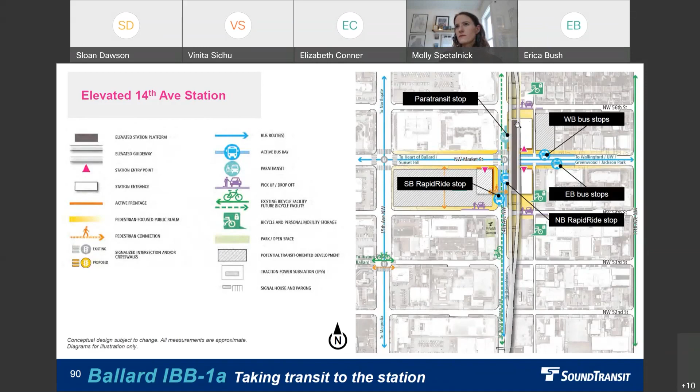And then paratransit would be proposed to be north of Market on 14th Avenue Northwest on the east side, adjacent to that North Station entrance.

The walking, rolling, and biking to the station, several things happening here. One is really looking at improvement to the frontage condition along Market Street, and further activating that with potential transit-oriented development between 14th and 15th Avenues.

And then also looking to the east, as Vera mentioned, with the extension of urban village zoning as redevelopment occurs, really tapping into an improved continuous sidewalk and frontage to 11th Avenue and even further to the east to 8th. This is also showing distributed bike parking zones near the different station entrances, acknowledging that the bike network here relies a lot on neighborhood greenway connections.

For instance, at 53rd and up at 58th and 60th. And the fact that 14th Avenue, there's an opportunity to really think about how that could host more robust facilities to connect between all these east-west greenway and trail facilities, as well as connect those facilities into the station.

And enjoying places around the station here, noting a couple of substantial opportunities for transit-oriented development on property that would be acquired to construct the project, and potentially also an integrated joint development of that southwest station entrance that could be incorporated into that development.

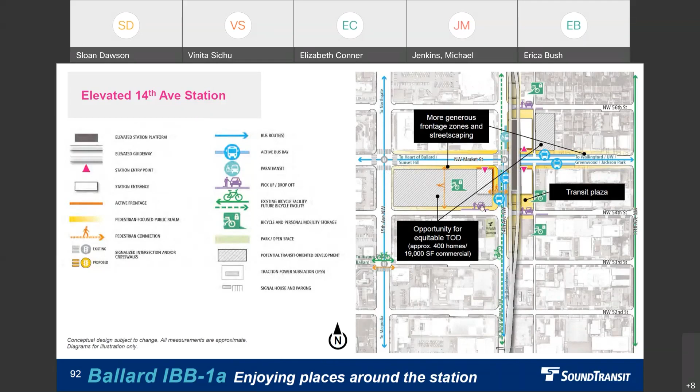There's also a transit plaza that would tie into that streetscape and frontage along 14th and Market Street. And the opportunity for TOD on the site or on these sites could accommodate up to 400 homes and nearly 20,000 square feet of commercial space based on our preliminary assessment.

So we're now going to look at the tunnel alternative, and a lot of the factors here are the same.

So I'm just going to point out that whereas we were looking at an elevated station, spanning the right-of-way and private property in 14th, now we're looking at a tunnel station. The tunnel would be entirely below the right-of-way in a cut and cover tunnel configuration, and that would have vertical circulation from platform, lateral movement over to the station entrances.

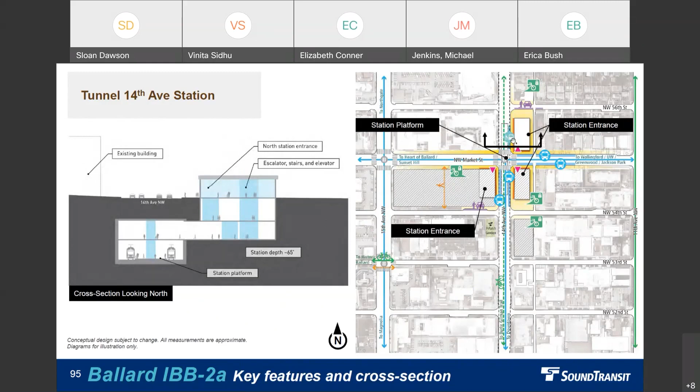This is the cross section on the north side of Market. It's not showing that there would also be a below grade span under 14th connecting the two station entrances on the south side of Market Street. So the station would be about 65 feet below grade at this point, which of course rises as we're moving to the north.

The bus stops and the service pattern I was noting earlier would be exactly the same with this configuration, as well as with the paratransit stops. Similarly, a similar pattern of bike parking as well as connection between greenway and trail facilities, as well as sidewalks. The big difference here is that you don't have the elevated structure's presence at grade here.

So now we're going to move one block to the west to the 15th Avenue alternative. This is the other preferred with third-party funding alternative. It's a tunnel 15th Avenue station, and here the adjacencies are somewhat similar, except now we have an entrance on the west side of 15th, which brings riders closer and also avoids an unnecessary crossing of 15th, for instance to the Swedish Medical Center and the heart of Ballard to the west, the heart of the historic district. It also shows that we have primary entrances focused on the south side of Market.

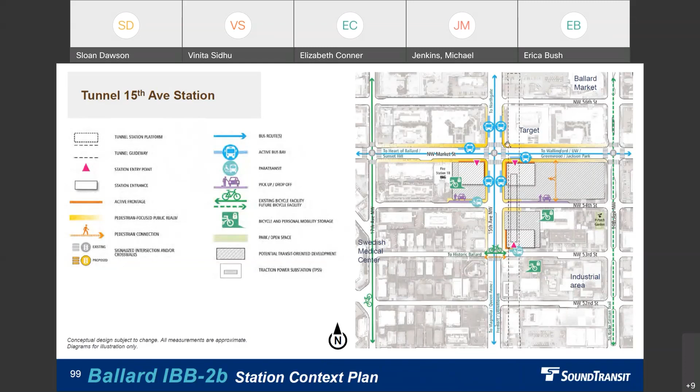With an opportunity perhaps to explore partnerships to site a smaller entrance on the north side of Market, but that would really be contingent upon working with established development and property owners.

This is a cross section through the 15th Avenue Tunnel Station. It's showing that pedestrian cross passage below 15th Avenue, tying together the west and the east station entrances, holding both corners of Market Street and 15th. You can also see the vertical circulation down to the station platform.

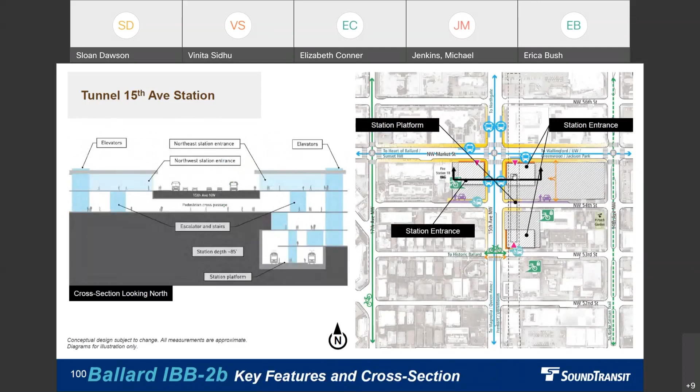It'd be about 20 feet deeper than the 14th Avenue alternatives, just owing to a shorter tunnel run, and also the need to clear the below grade structures of adjacent development to the north. The platform would be centered under 54th, just south of Market Street. And the transit integration scheme here is a little bit more complicated than the 14th Avenue alternatives.

So we would have bus stops going eastbound and westbound, far side Market Street in both directions. And then we'd have the rapid ride remaining on 15th and stopping on both sides of the street, which would have ready access to the primary station entrances. You do see there are a few stop zones and routes that would require one or maybe two street crossings to get to one of the current station entrances. So that was part of that earlier statistic that Emily was pointing out that might be able to be ameliorated if we can partner on an additional entrance north of Market.

Paratransit would be farther to the south near 53rd Street. Pointing out walking, rolling, and biking, similar opportunities for thinking about 14th Avenue as a bicycle corridor, stitching together these different east-west neighborhood greenway connections, but also an established greenway on 17th. So maybe thinking about facility upgrades there, and then looking at these lateral connections or crossings of 15th on 53rd and 56th, and maybe even Market Street as sidewalk improvements and other frontage improvements are contemplated.

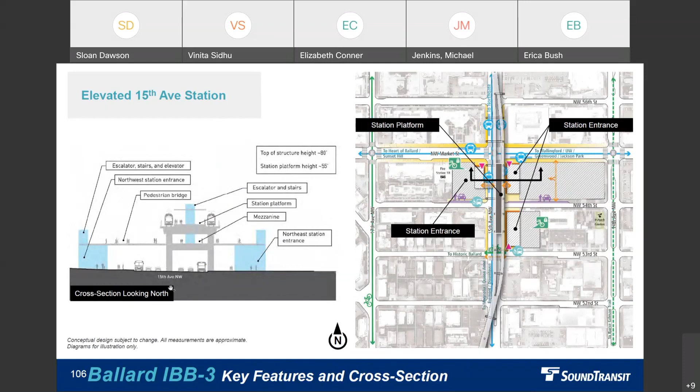There would also be a partial span of the platform into the right-of-way, so there would be some potential street uses and travel lanes below the station structure.

The bus stop pattern is the exact same as we looked at with the 15th Avenue alternative, as well as the bicycle, walking, and rolling considerations, with the notable addition here of the elevated structure, which creates things that would have to be carefully thought through in terms of sight lines and such. The column placement does anticipate that in the current configuration, but if this moved forward, we'd look at that in greater detail and design.

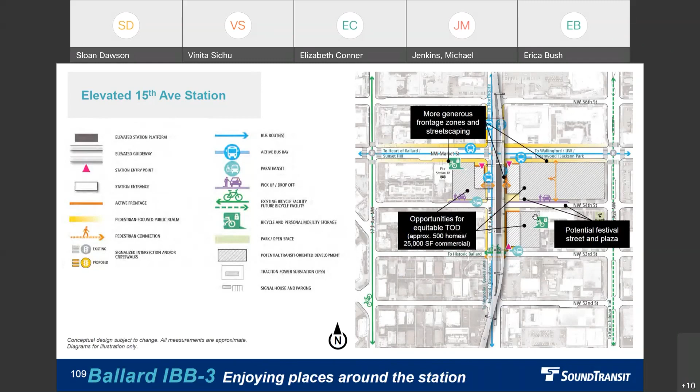Slightly less potential development yield, again owing to the elevated footprint projecting a little further into the buildable area and the need for a setback from that structure. So it's about 500 resident units, with similar opportunities for Festival Street and public space.

So it's a lot of information. I'm going to turn it over to Colin to walk through some of the city's observations.

Thanks, all right, next slide. We only have a couple slides here, so this should be quick. Sound Transit has laid out many more considerations than are going to show up on this slide.

When the city interdepartmental team took a look at the trade-offs between the Ballard station locations, the ones we focused on, the elevated alternatives, there were concerns about the impacts from the bridge and the elevated guideway, noise impacts during construction and operation, impacts to the natural environment due to in-water bridge work, and navigation impacts during construction and operations, impacts to Fisherman's Terminal, greater business displacements, and undevelopable remainder parcels as a result of elevated guideway structures.

When we were looking at trade-offs between 14th and 15th, the tunnel alternatives, the tunnel on 14th does have an entrance spanning Market, and that is desirable. The tunnel on 15th has an entrance spanning 15th Avenue Northwest. Ideally there would be entrances spanning Market and spanning 15th Northwest to enable pedestrian crossings to occur underground and avoid surface conflicts between vehicles and pedestrians. So we'll continue to work with Sound Transit on those opportunities.

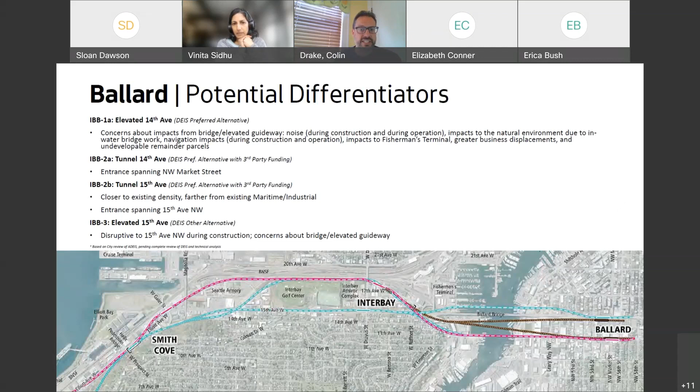Next slide, please. As Sloan discussed, when we take a look at the trade-offs between 15th and 14th, there's pros and cons for bus integration on each. As this discussion advances, we can continue to look at those. Our take was that 15th is better for transit integration, even with the consideration of Metro Connect's desire to have the D line terminate here. Also, the 15th Avenue alternative allowed for agency TOD on both sides of 15th, and that is an attractive opportunity for TOD. And that is the end of the city observations.